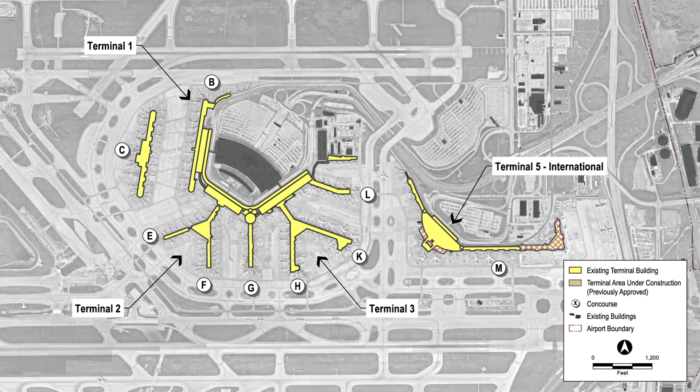This is a depiction of the current O'Hare terminal configuration. It shows terminals 1, 2, and 3, and International Terminal 5. Improvement projects are proposed to areas throughout the terminals and the airfield.

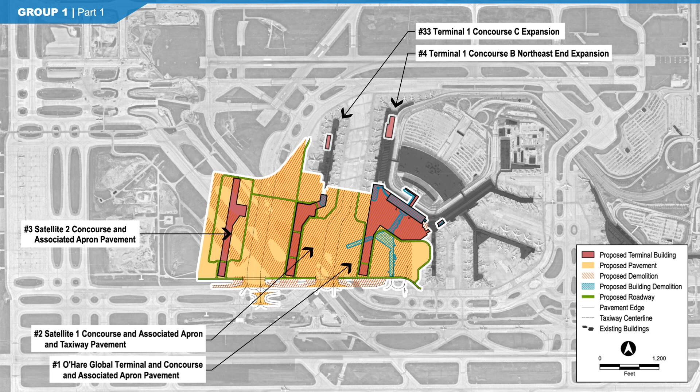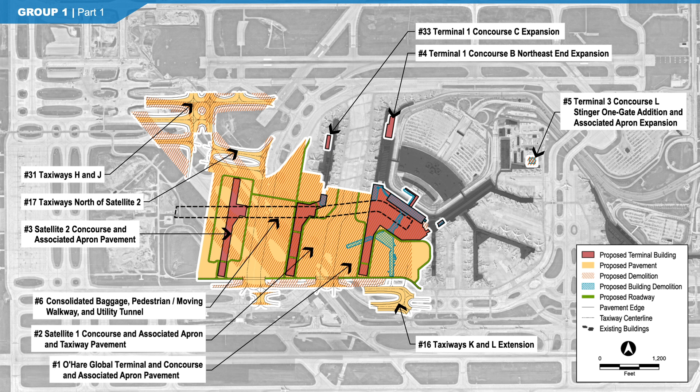Numerous projects are proposed for the terminal area. They include construction of the new O'Hare Global Terminal and Concourse, construction of the new Satellite 1 Concourse, construction of the new Satellite 2 Concourse, expansion of the Terminal 1 Concourse, in addition to the Terminal 3 Concourse L Stinger, construction of a consolidated baggage, pedestrian, and moving walkway tunnel, extension of taxiways K and L, construction of new taxiways north of Satellite 2, modifications to taxiways H and J, and the reconfiguration of taxiways A and B.

Also, here are 2 temporary terminal area proposals: a temporary walkway and extended jetway from Concourse C, and a temporary heating and refrigeration facility.

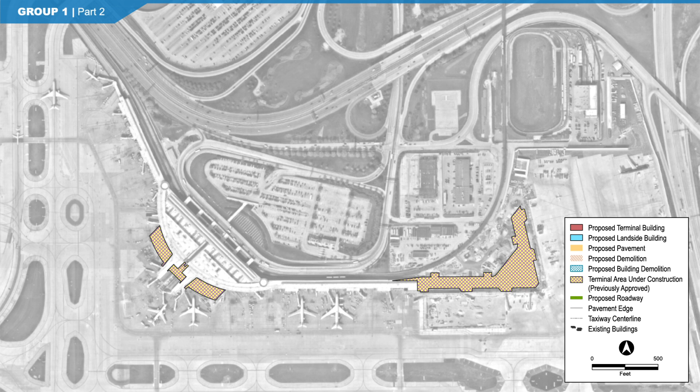Projects planned for Terminal 5 include a curbside addition and an interior reconfiguration of the terminal, roadway improvements, a curbside expansion, and construction of a parking garage.

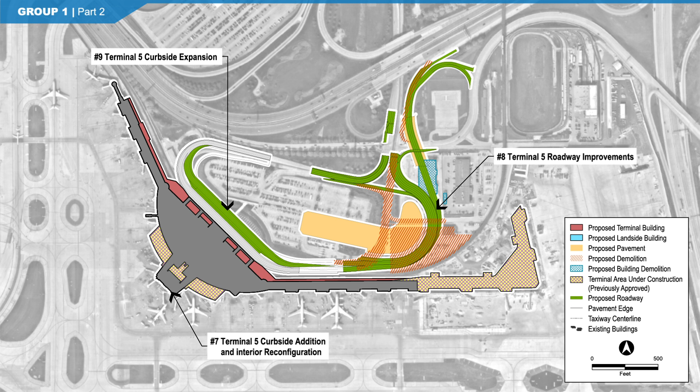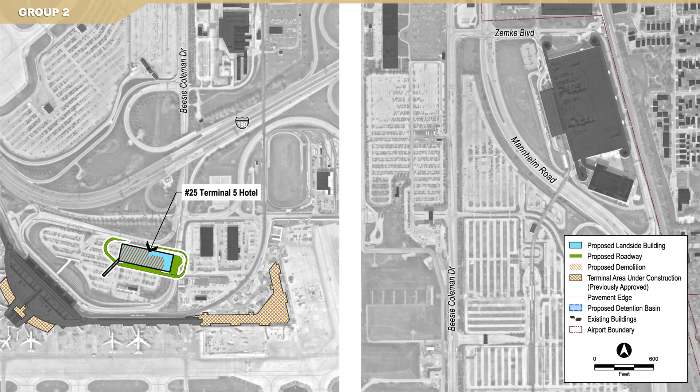There are 2 proposed on-airport hotels. One hotel will be built near Terminal 5, and the other project is a new hotel on Mannheim Road near the multimodal facility. It will include possibilities for retail or dining developments.

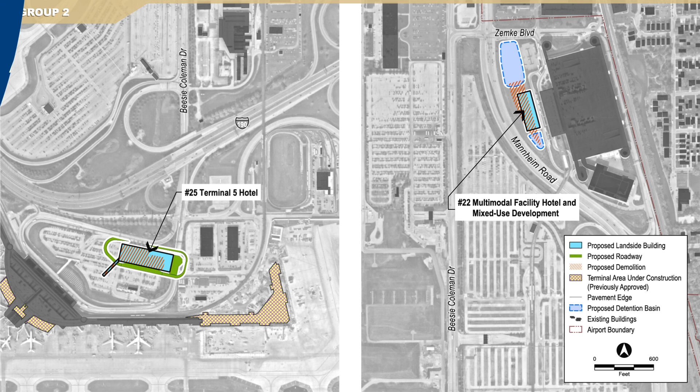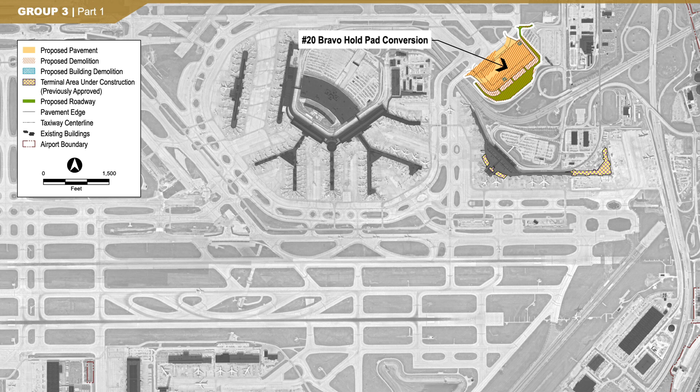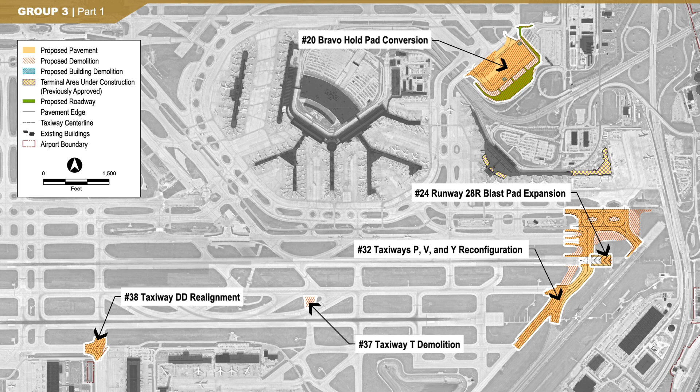The proposal includes airfield and taxiway improvements that are not required by the terminal projects. They include conversion of a vehicle parking area to an aircraft hold pad, expansion of the runway 28 right blast pad, reconfiguration of taxiways P, V, and Y, demolition of taxiway T, and taxiway DD realignment. Within this project group, there is a proposed construction of additional exit taxiways near runway 9 left, 27 right.

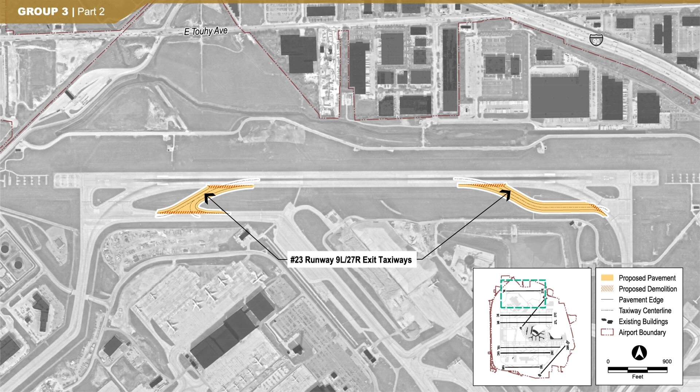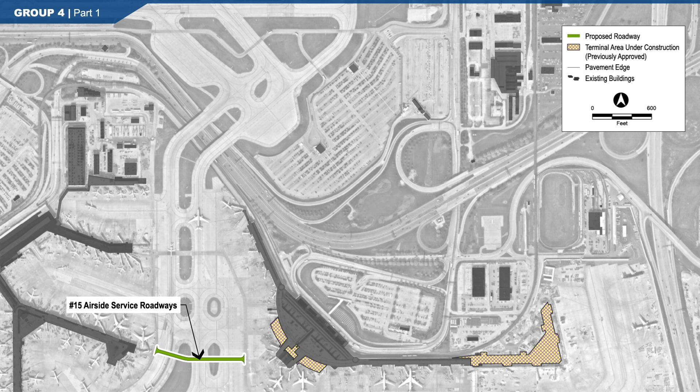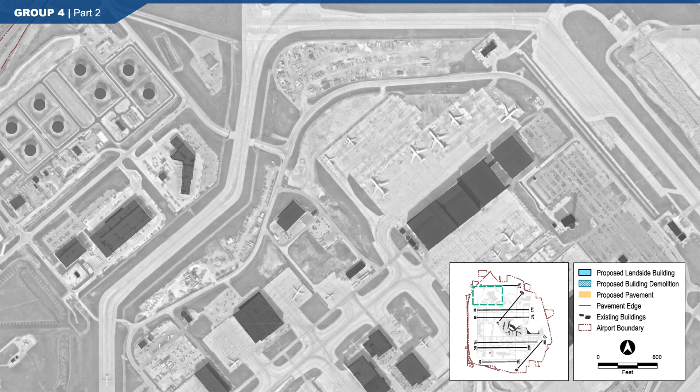There also are a number of support facilities to be improved that are independent from the terminal projects. A new airside service roadway is proposed, and there's a planned expansion of the commercial vehicle holding area. In the northwest corner of the airport, the project proposes to move Aircraft Rescue and Firefighting Station 4 to a new location.

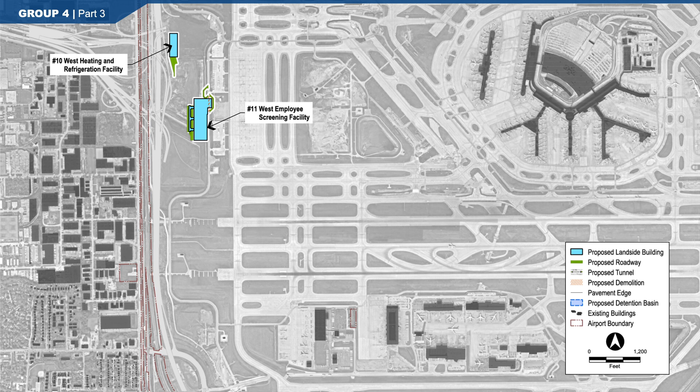On the west side of the airport, there would be a number of additions, including a new heating and refrigeration facility, an employee security screening facility, an employee ground transportation facility and parking garage, a landside access point for airport employees, construction of new landside detention basins, new airside service roadways, and a centralized distribution and receiving facility.

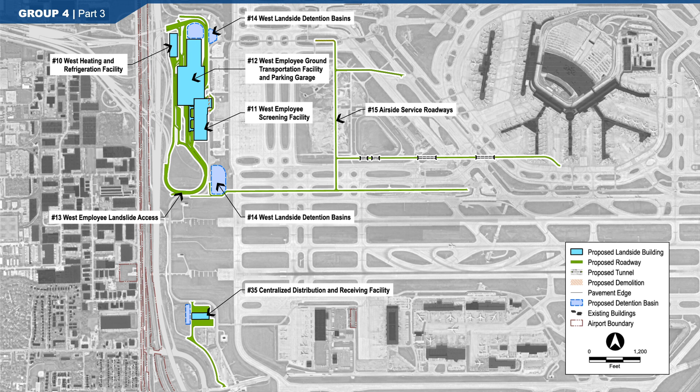Above and beyond the airfield, there also is an air traffic proposal that would make permanent the previously approved offset approaches to runway 10 right, 28 left. The current air traffic procedure allows for simultaneous approaches to 3 runways and allows for future simultaneous approaches to 4 runways. These procedures had been approved previously for temporary use, and the proposal would seek to make them permanent.

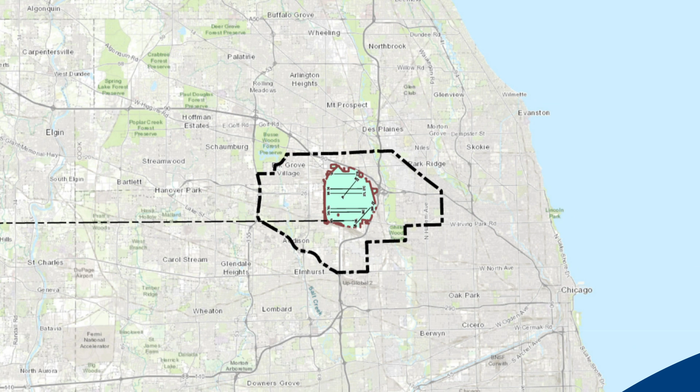In the east flow configuration, the proposal makes the procedure permanent that allows for a 2.5 degree offset, or slightly angled approach, for arrivals to runway 10 right. The offset occurs when flights are flying westward and after some of them turn to the east to make a final approach to runway 10 right.

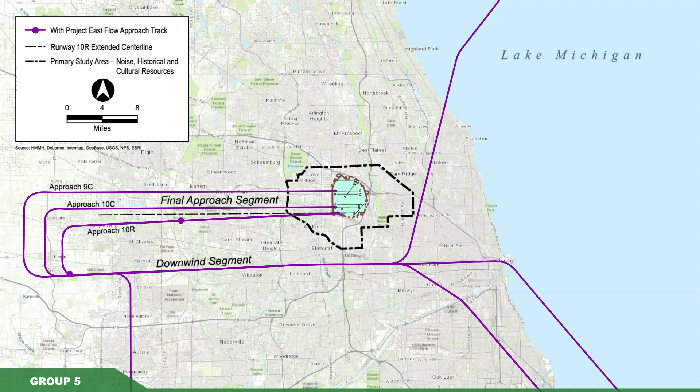If the procedure is not made permanent, air traffic would revert to the previous procedures. Arrivals to runway 10 right could not be made at the same time as arrivals to runway 10 center. This would lower the arrival rate and increase flight delays at the airport.

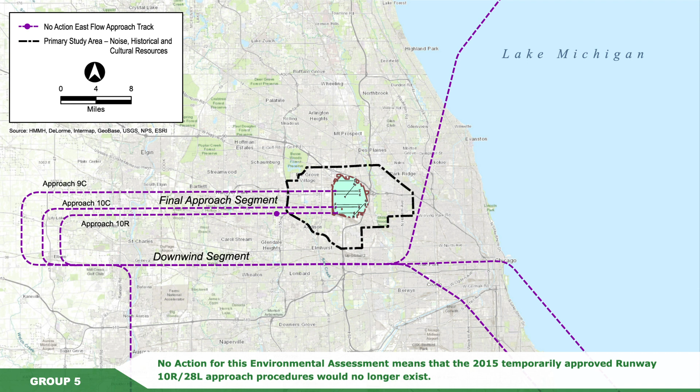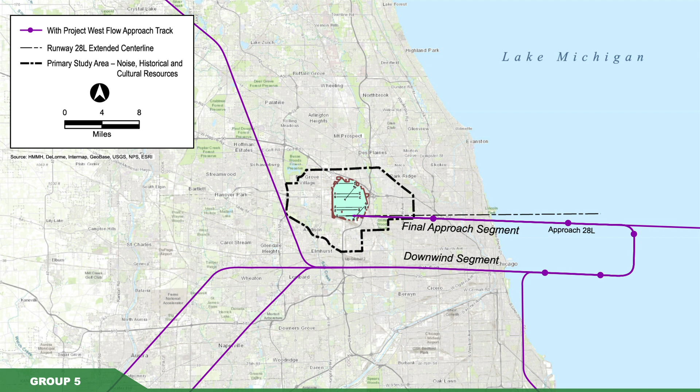In the west flow configuration, the proposal makes the procedure permanent that allows for a 2.5 degree offset, or slightly angled approach, for arrivals to runway 28 left. The offset occurs when flights are flying eastward and after they turn to the west to make a final approach to runway 28 left. If the procedure is not made permanent, air traffic would revert to the previous procedures.

Arrivals to runway 28 left could not be made at the same time as arrivals to runway 28 center. This would lower the arrival rate and increase flight delays at the airport.

Next is video 3, the evaluation of alternatives.